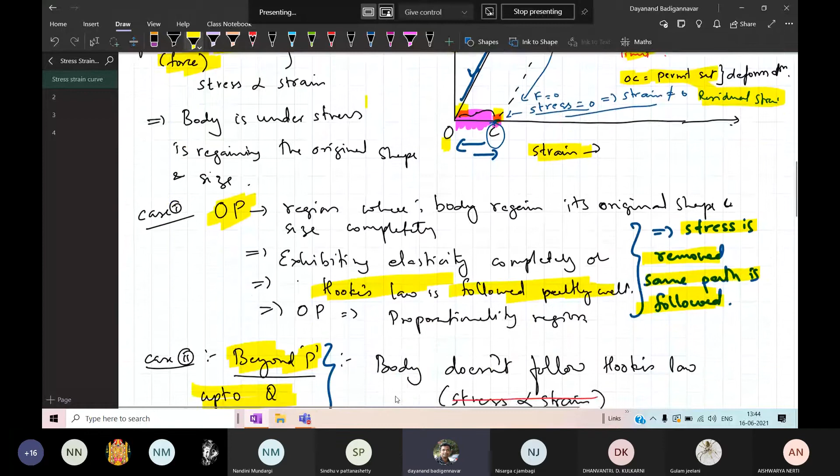This is beyond P and up to Q. So beyond P up to Q, the body doesn't follow Hooke's law - Hooke's law means stress is directly proportional to strain, and this is not followed by the curve. Though it is an elastic material, if the stress is beyond the proportional limit, it is in the elastic mode but not satisfying Hooke's law.

In this region between P and Q, it is not following Hooke's law - it is a non-linear part. But still it is an elastic material, though some plasticity has come into the picture. This is called the non-linear phase, and point Q is called the elastic limit.

That means this is the maximum stress, called sigma Y. Beyond sigma Y, if you apply any stress, the material enters into... this is called the elastic limit, or in other words, it's called the yield point - sigma Y is called the yield point.

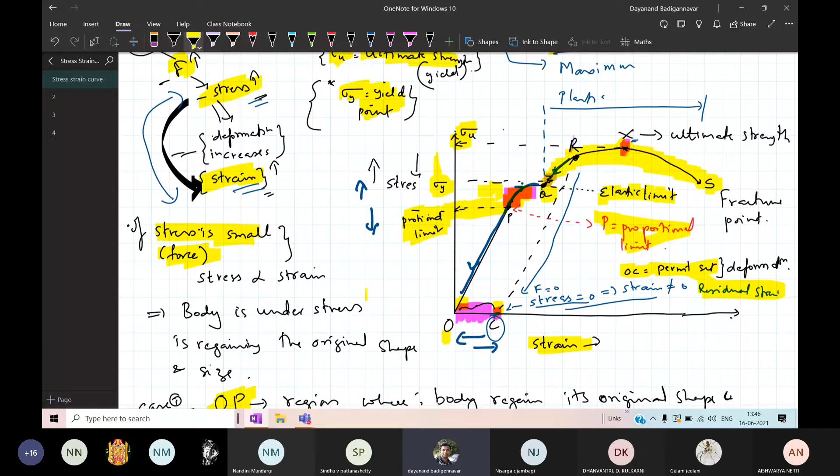Now up to point Q, what happens here? If the stress is up to this limit, the curve will follow the same path, OP. That means as the stress increases, the curve will increase from O to P, from P to Q.

But what about Q to S? Of course, it is going to increase from Q to S, but when it is coming back, it is going to decrease like this. But what happens when you decrease the stress? The curve will not follow the same path. It is going to follow a different path.

So what happens if the stress is removed? For example, at point R, if you are decreasing the stress, the curve will not trace the actual path it has taken. It is going to take some other path, the path RC, shown as a dotted line. You can see the curve it is going to take like this.

So up to this point, it is going to decrease in this manner. Once it is decreasing like this, when the stress is completely removed, our force is made zero, the strain is not completely zero. There is some amount of strain that is still existing, OC.

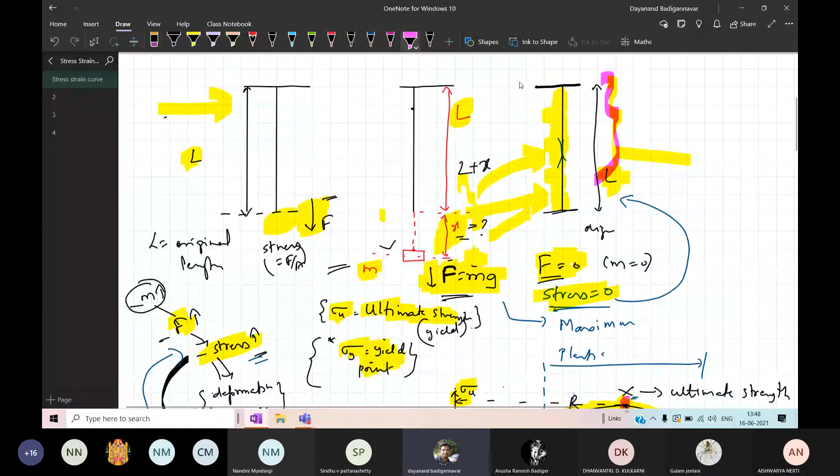So that means I have removed the force. After removing the force, if you look at the above diagram, the body should go back to its original state, but it is not in the original state — it is in the deformed state. Therefore, OC represents some residual strain, meaning there is some deformation left over even when I remove the applied stress.

This is called the permanent set. OC is called the permanent set, or it is also called the residual strain, OC, or the deformation that is existing.

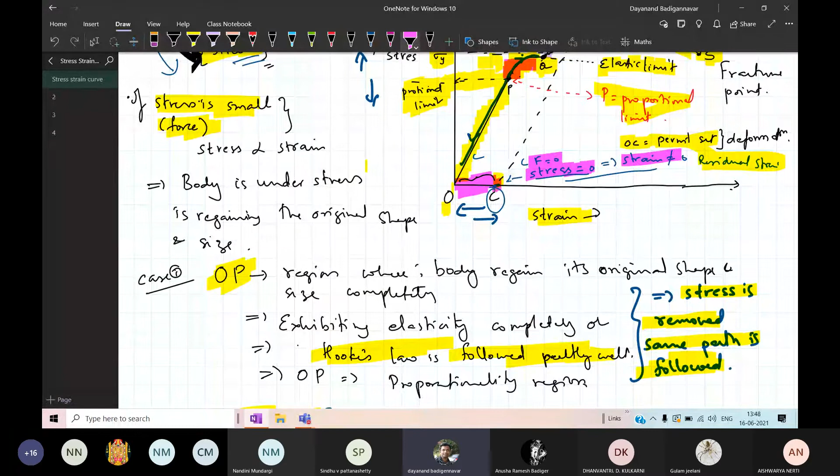Now, if you still increase the stress up to point X, this point is called the ultimate strength point. That means the stress is very, very high at point X. This value is called sigma U, and this is called the ultimate strength.

So what happens beyond this value? If the stress applied is beyond the ultimate strength, the body will start to break down — it starts to get damaged. Up to point X, if you increase the stress, it is in some good condition, but if the stress is beyond point X, the body starts to deteriorate.

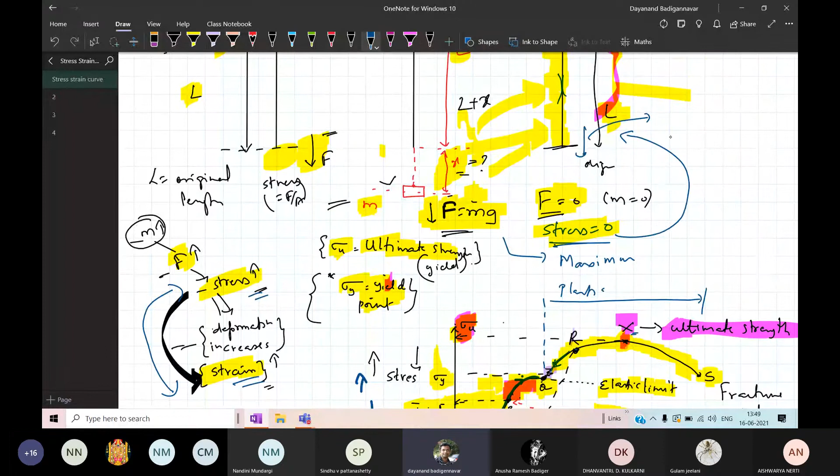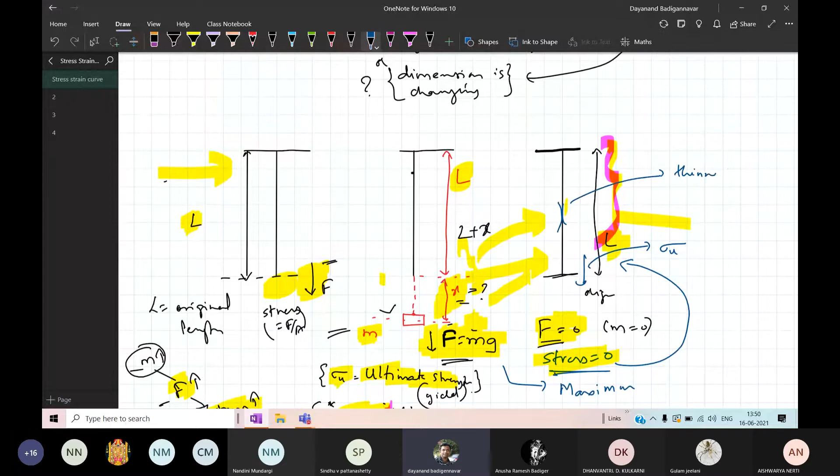So once you have the wire, if you apply a stress beyond the value of ultimate stress, sigma U, this wire starts to thin — meaning its diameter goes on decreasing if the stress is more.

So the wire is thinned in such a way that the material starts to lose its strength, and after that slowly the material gets deteriorated. If the stress reaches the value at point S, the wire completely breaks down — that point is called the fracture point. This is the way the stress versus strain curve varies for a wire.

Very simple thing, you have to remember 2 points. Between O to P, it is a linear region, obeying Hooke's law. From P to Q region, it is a non-linear region, where the material is an elastic material, but it is not obeying Hooke's law.

Beyond Q up to point S, it is a plastic region. If you remove the stress when you apply it in the plastic region, it does not follow the same path. It follows the path OC, along RC, where some amount of strain is still left over. That OC is called the permanent set or permanent deformation.

At point X, called the ultimate strength, the wire is handling maximum stress. Beyond that, it cannot handle any stress and breaks down. So at point S value of stress, it breaks up, because beyond point X, the wire starts to deteriorate from excess stress.

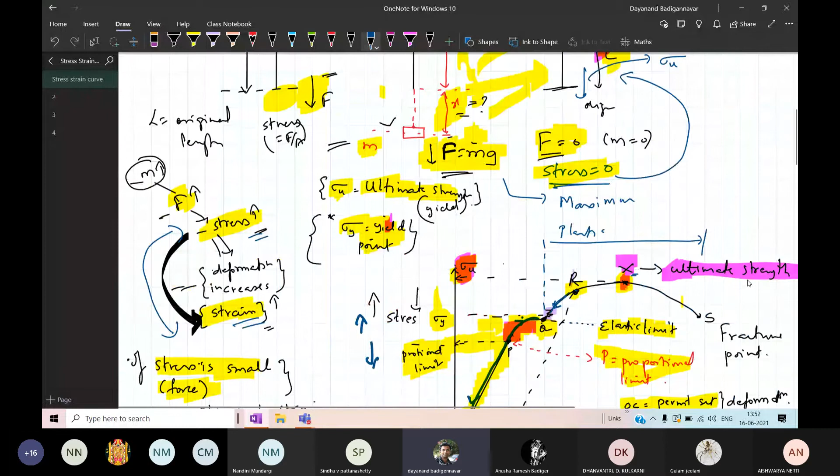So this is the curve. This is a very important question for your IA: explain the stress and strain curve. With this, we shall go for the next part.

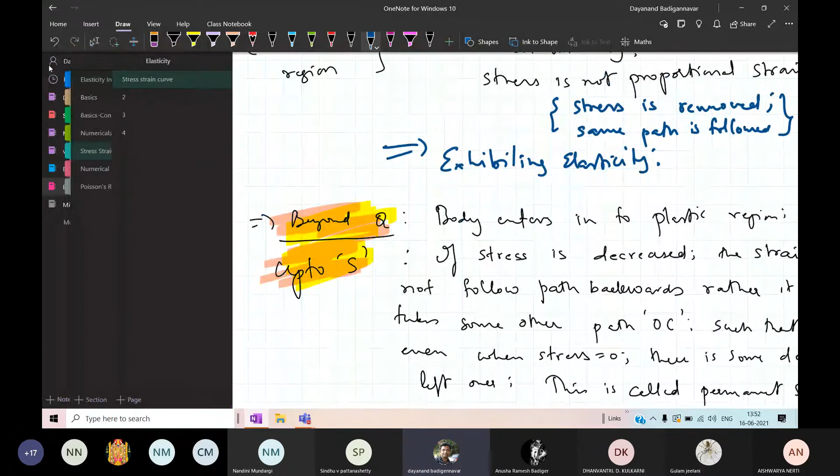Before we go for the next part, we shall solve a few problems left from the last section. Let us go for the problematic part that we have left over. This is the next one. Take down the problem.

Calculate the extension produced in a wire of length 2 meters and a radius of 0.013 into 10 to the power minus 2 meters due to a force of 14.7 Newton applied along its length. Given the Young's modulus of the material is Y equal to 2.1 into 10 to the power 11 Newton per meter square. Take down this and try to solve this.

Hello students, solve this problem and tell me the answer.

Take down this, students, do one thing: take this and solve it as an assignment. I would like to go for some other important discussion, because in the next class if I do it, it will be half done, and it's not possible for me to start a new chapter. So take this as an assignment and solve it; else I will solve it at the end. Don't worry, take this as an assignment and solve.

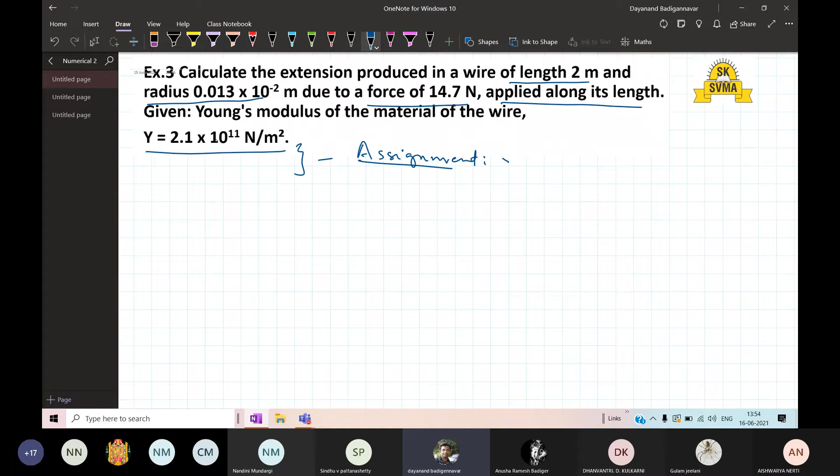Can solve it afterwards. So we shall go for the next one. There are other important terms that you should know here. There are some other terms that you should know.

There are some other terminologies or terms that are used in elasticity again and again, which characterize the physical property, which characterize the elastic property. There are many other properties, not just one. There are a few other terms that you should know.

The first term that you should know is the longitudinal strain coefficient. I have a certain wire. So what is this longitudinal strain coefficient? Let us go for that understanding.

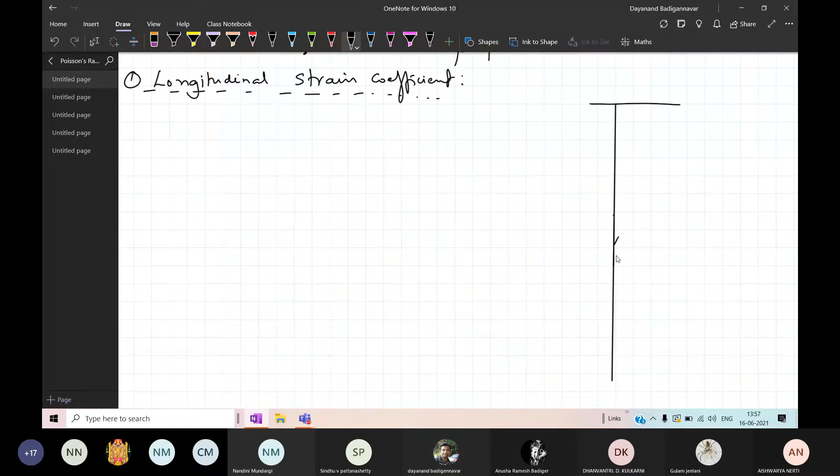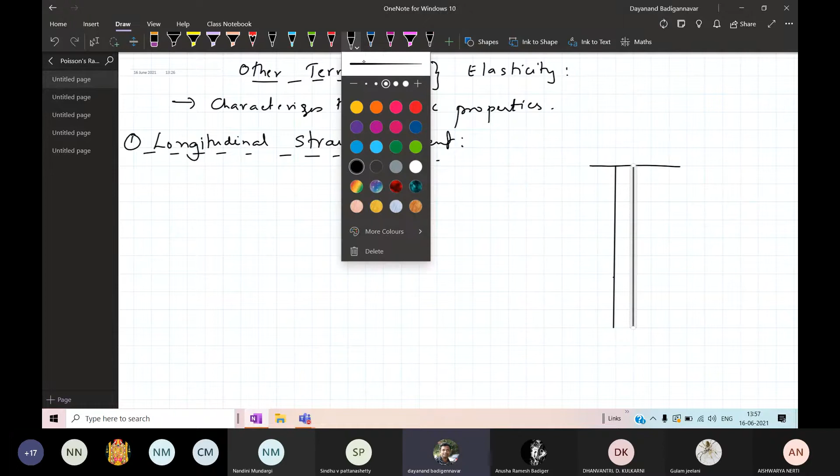I have a wire, in the shape of a circular manner. This is the wire, a circular wire, and this is the cross sectional area of the wire, whose length is L. This is the length of the wire. So what I do, I apply a force.

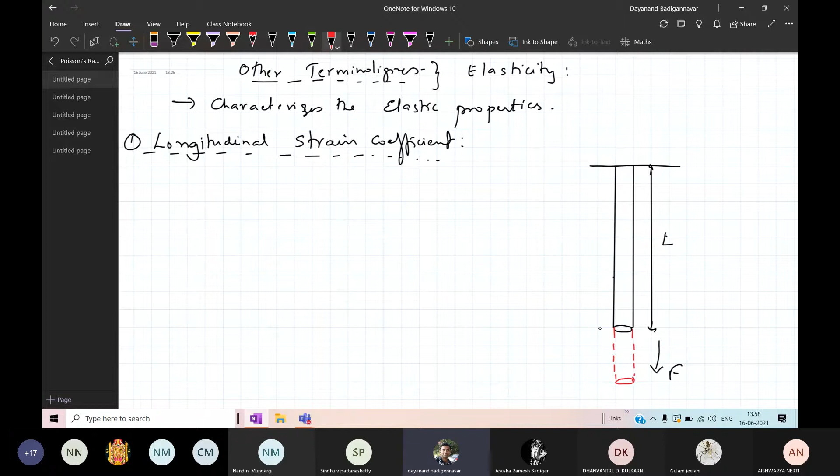Once I apply a force, there is an extension in the wire. This is the extension in the wire, like this. The wire gets elongated. Let us assume that this is the elongation that has taken place. How much is the elongation? The elongation is X.

The elongation is X. So here I can define strain. What type of strain is it? By the application of the force, which I have applied along the length of the wire, I can define the stress for this. Since it is along the wire, I should call it longitudinal. First I will define strain, then the force: once I apply the force, there is an extension in the value of the wire, so this much is the extension X. So this is the longitudinal or linear strain. This is the first one, strain.

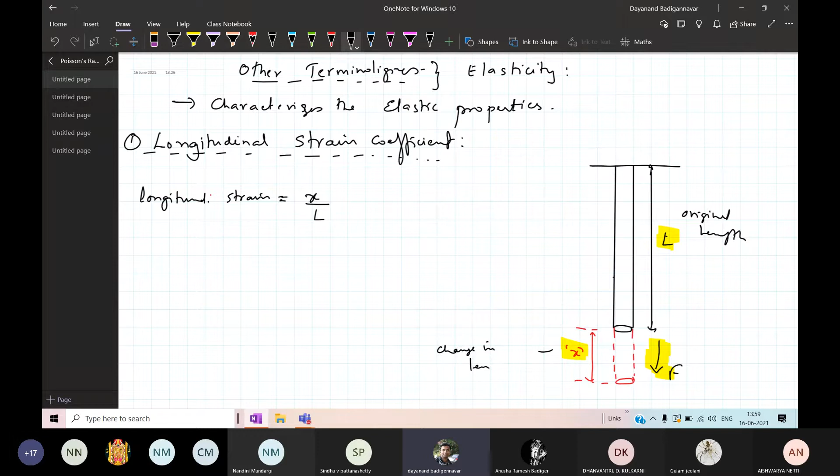What is strain? Strain is the ratio of change in dimension to the original dimension. What is change in dimension? It is the value of X, this much the dimension has changed. What is L? It is the original length. So L is the original length, and X is the change in dimension, the change in length, since length is increased. This is how I define the longitudinal strain.

Now I can also define stress. What is stress? Stress is nothing but force per unit area. This is the applied force, and this is the cross-sectional area A. So I can write stress is equal to F by A.

Now what type of stress is this? The stress is such that there is an increase in the length of the wire. So whenever the stress is such that it increases the length, that stress is called the tensile stress. It is known as the tensile stress. In general, it is also called longitudinal stress.

Now this stress I will take as T, longitudinal stress. Keep in mind, I have taken it as T, not tension. It is longitudinal stress T, which is equal to F by A. So this is equation number 1 and this is equation number 2.

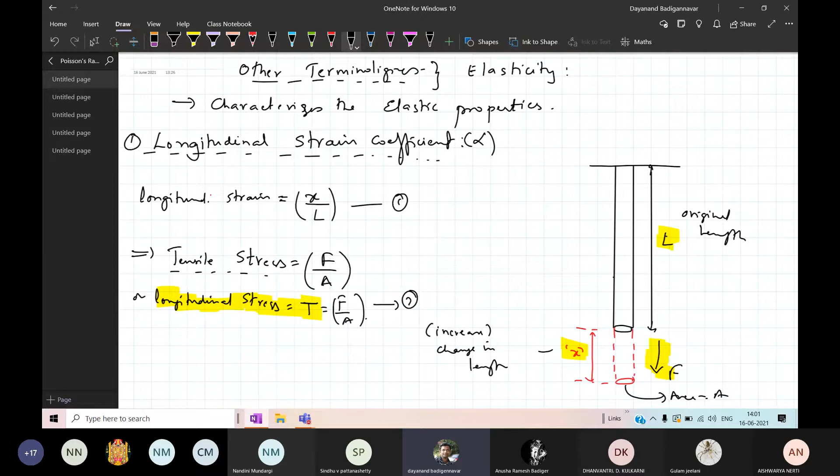Then I can define the longitudinal strain coefficient. What is this longitudinal strain coefficient? This is a very important term that we will use again and again in the coming classes.

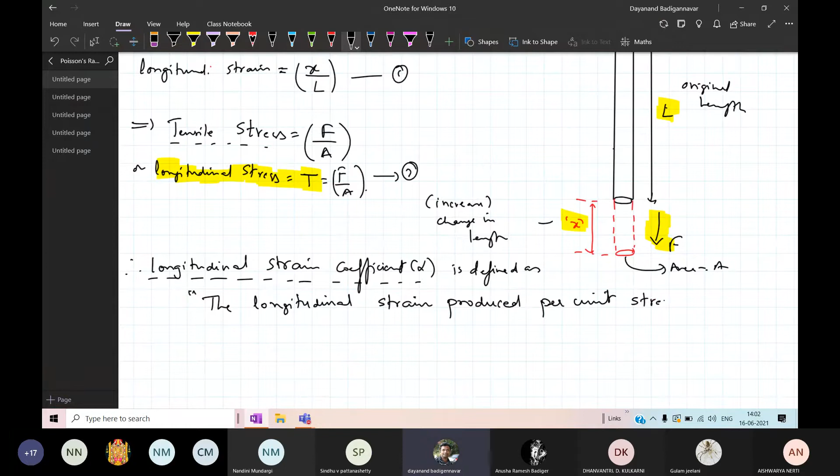The longitudinal strain coefficient is defined as the longitudinal strain produced per unit stress applied. So this is the meaning of longitudinal strain coefficient.

Just for reference, you know that modulus is defined as stress divided by strain, that is, stress per unit strain. Now I am defining the longitudinal strain coefficient alpha as exactly the inverse of this.

So if I rewrite this as a ratio, I can write the longitudinal strain coefficient alpha as the longitudinal strain produced per unit stress, that is, the ratio of longitudinal strain per unit longitudinal stress.

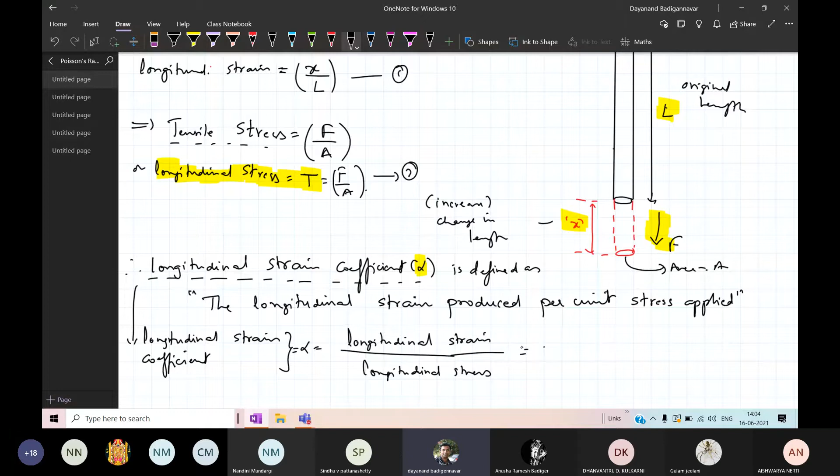So therefore I can write the value of alpha as strain divided by stress, which is just the inverse of the modulus value.

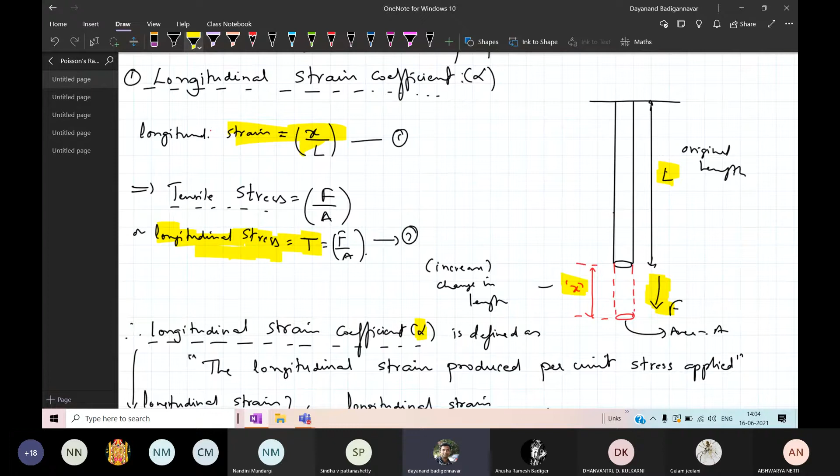Therefore alpha equals strain, which from equations 1 and 2 we know: longitudinal strain is given by X by L, and longitudinal stress is T. So from equations 1 and 2 I can write alpha in terms of X by L, the longitudinal strain, and T, the longitudinal stress.

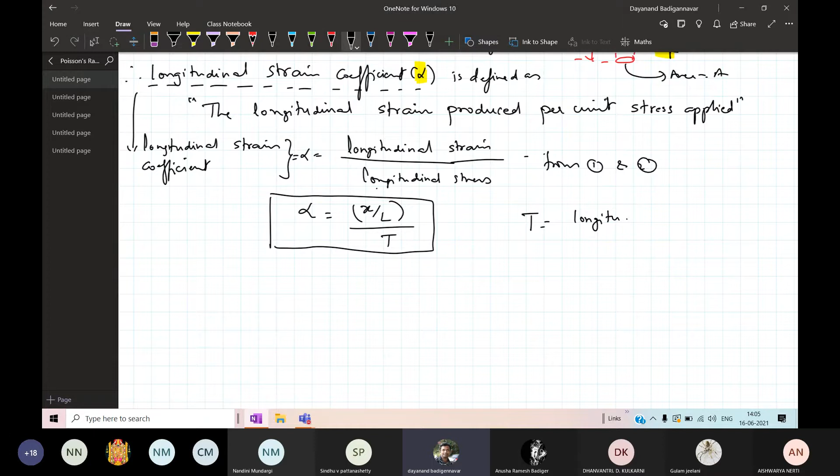Keep in mind, here T is the longitudinal stress, not the tension. Don't get confused, tension is also represented by T, but here I write T as the longitudinal stress.

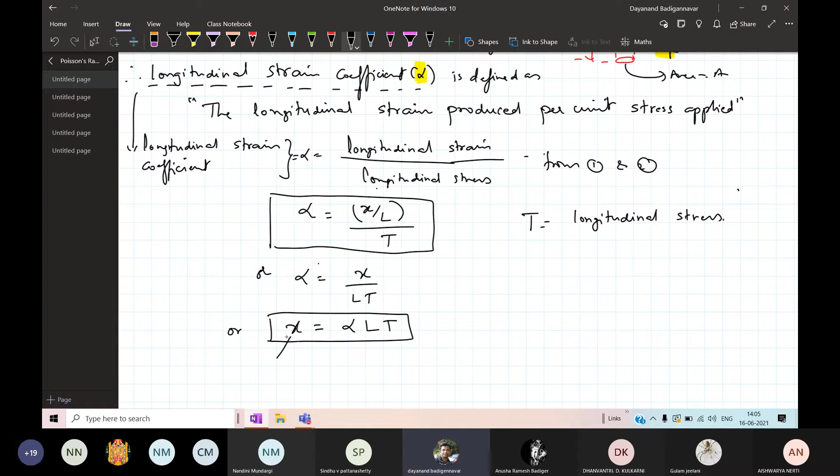Now I can write alpha is equal to X divided by L times T. Rearranging, X is equal to alpha LT. What is this X? X is the extension, the extension that has taken place. So you can calculate the value of X.

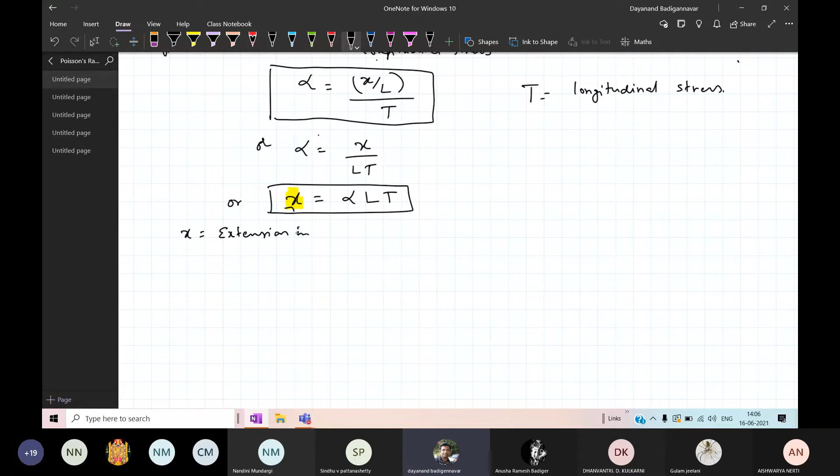Okay, what is X? X is the extension or elongation in the length of the wire. You can calculate it. We'll take this as 3, this as 4. Very important, you can calculate how much is the value of extension. If we can calculate x, okay, we can calculate x.

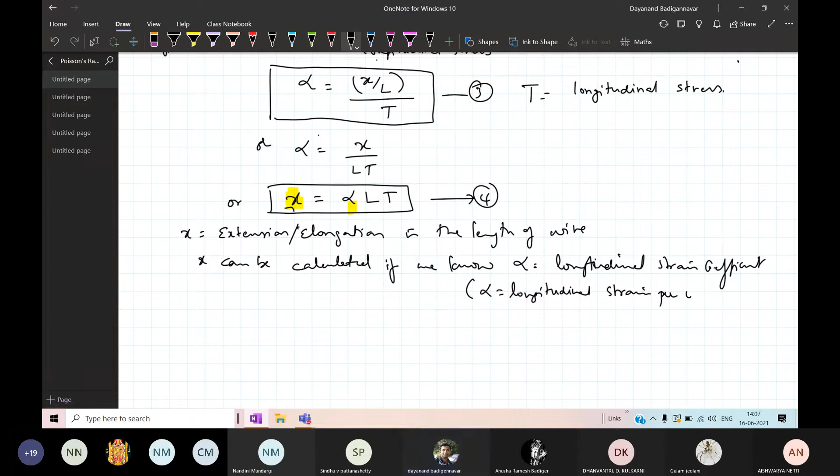X can be calculated if we know alpha. What is alpha? Alpha is the longitudinal strain coefficient. It is also called as strain or longitudinal strain. Keep in mind, it's also called as longitudinal strain per unit stress. That means per unit stress, how much is the strain that is taking place? That is the meaning of alpha.

What if you put 1 unit of stress, what is the corresponding strain? That strain is called as the alpha, for the applied unit stress - this is the applied stress, 1 unit stress. It may be 1 Newton per meter square, or 1 Newton per centimeter square, whatever it may be. So 1 unit stress will produce some strain. So what is that strain? That is called as alpha.

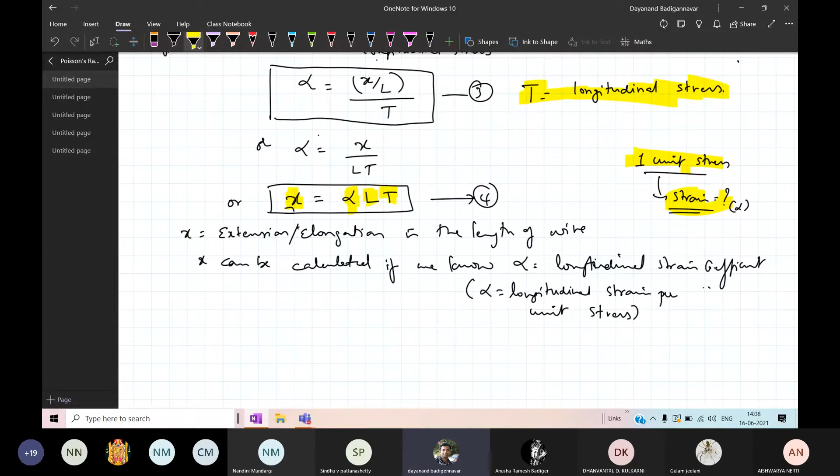Then you should know the original length of the wire. You should know the T. What is T? T is the longitudinal stress. If you know all these values, you can calculate the value of X, how much is the extension that can be produced in the wire. You are getting the point? So this is the very important point. Okay, so go for the next one. This is alpha. Hope you have taken down.

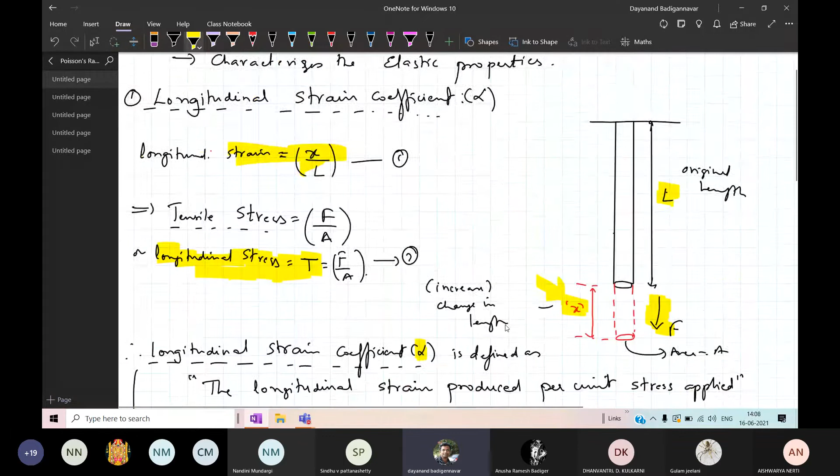Then next one, that is called as the lateral strain coefficient. This is the second term that you should know.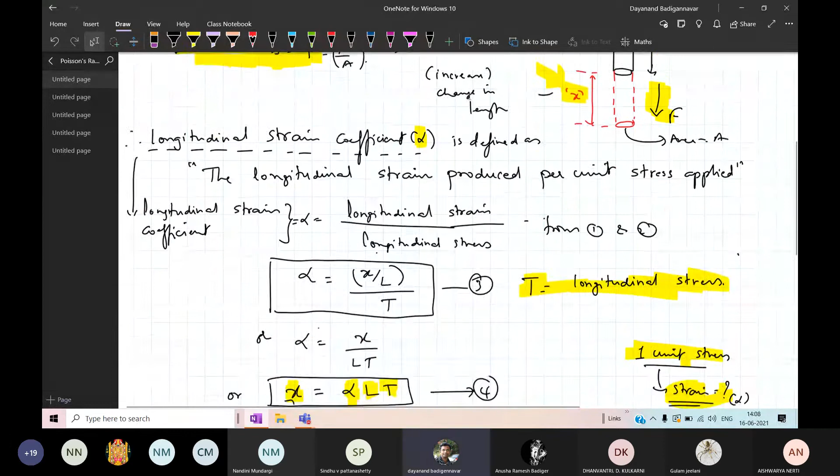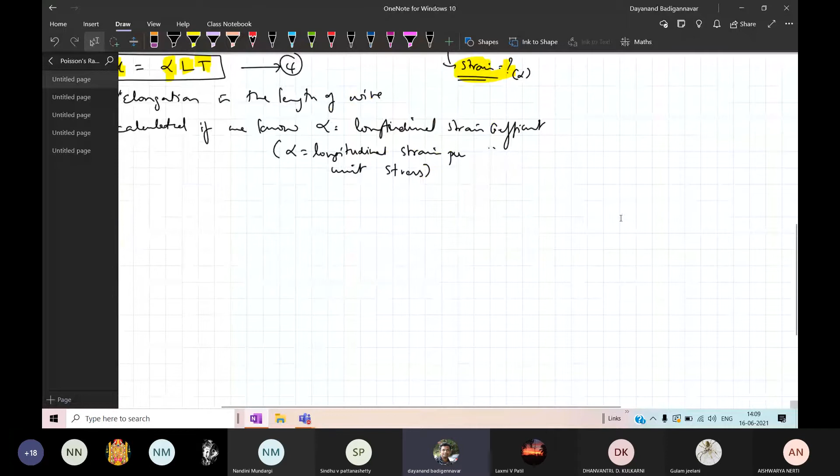Sir, students are here. Sir, want your screen? Wait, sir, okay, sorry, I was zooming that, no trouble here. Just a minute. Okay, now it's clear. Yes sir, got it? Yes sir.

Okay fine, let's go for one more important term that is called as the lateral strain coefficient. Lateral strain coefficient. This is called as beta.

Okay, so I'll explain this first, then define it. So I have a wire, same wire as you have seen the last part. I have the wire in the form of a circular shape. This is the wire which is in a circular shape.

Got it. So I will just have to make this bit larger this time, so that it is clear for you. Okay, I have a wire which is in circular manner. So therefore this will be the cross section here. This is the cross section that you have for the wire.

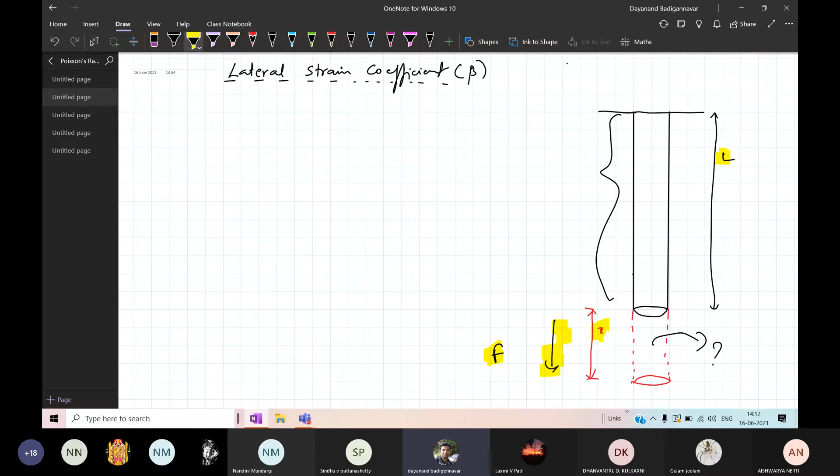You are adding some wire to it, some material to it. So this X means you are adding some material to it. Do you agree with this?

Adding some material - how? So increasing the length means you are adding some material to the wire. Is it physically possible that you are adding some material to the wire?

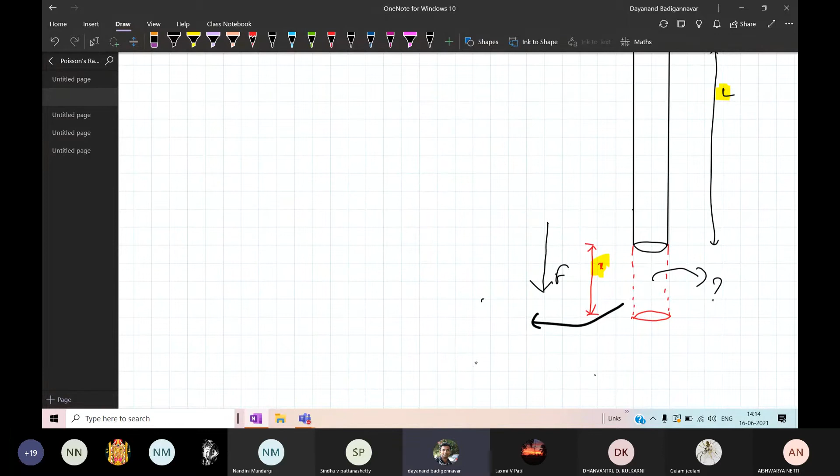Now once you apply the force, there is an increase in the length of the wire. This is the direction of the force - I will write it here again for simplicity. So this will be the direction of the applied force. This is the cross sectional area, A.

Now what happens is that when you apply a force - it may be a physical force or it may be a load M - there is an increase in the length of the wire because some of the material gets displaced in the wire. What actually happens is that by applying the force, there is a decrease in the diameter of the wire.

Keep in mind. So this much is the increase in the length.

So therefore, here I will write: the length is increased in this case. There is an increase in length of the wire. This is because it leads to a decrease in the diameter of the wire. Diameter of the wire - you are getting the point?

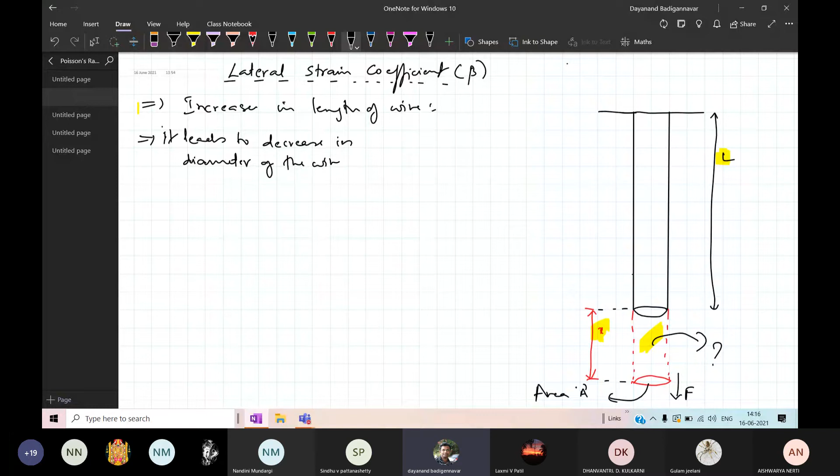Now I had asked one simple question: how is the material added here? The material is not added by hand. Actually, what happens is that once you apply a force, there is an increase in the length of the wire because the diameter - let us assume the diameter of this wire is D.

By application of the force, the length increases by X, but the diameter D decreases. The diameter shrinks, and it is going to decrease like this. This is the way it is going to happen.

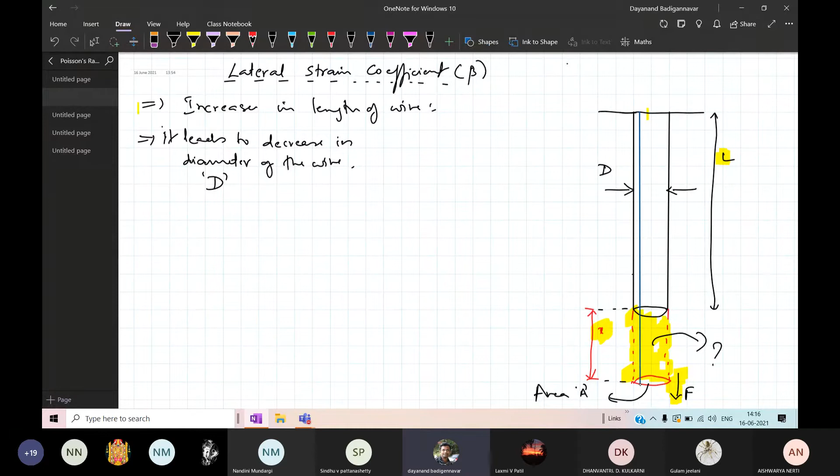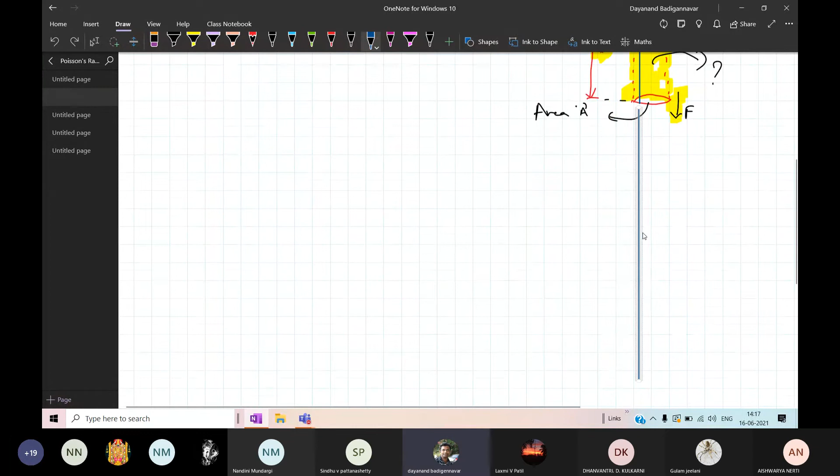So the blue line you can see there - this is the one which you have. So I have the wire, and it has shrunk in diameter.

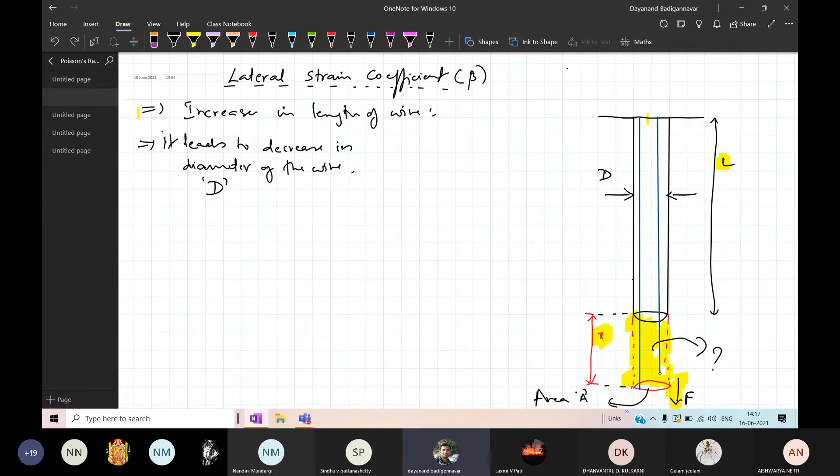So there is a decrease in the diameter. Got it? So therefore, whatever decrease in diameter has taken place, keep in mind - this is the decrease in diameter. Look at the diameter: earlier the diameter was D. Now, what is the diameter? It is lesser than the previous one.

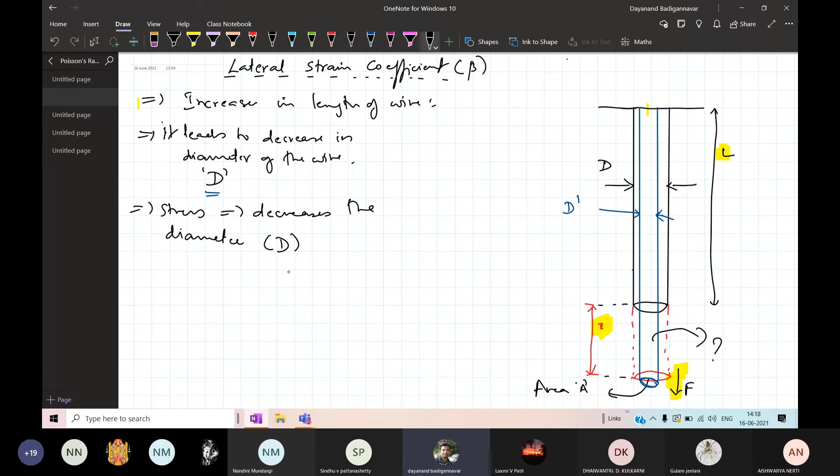It is lesser than the previous one. So what is the diameter now? The diameter is D dash. Now the diameter decreases. Therefore, here on application of the force, the stress that is present decreases the diameter. The diameter decreases - what is the diameter? Diameter was D, and it decreases to the new diameter, D dash. You are getting the point - the wire has been thinned.

So if you have seen the rubber that is used in a sweet box, I have given an example. No, this is a box, and you are having the wire, the rubber, like this.

So this is how the rubber works. It is perfectly fitting the box. Is it not? Since it is perfectly fitting, we are using it.

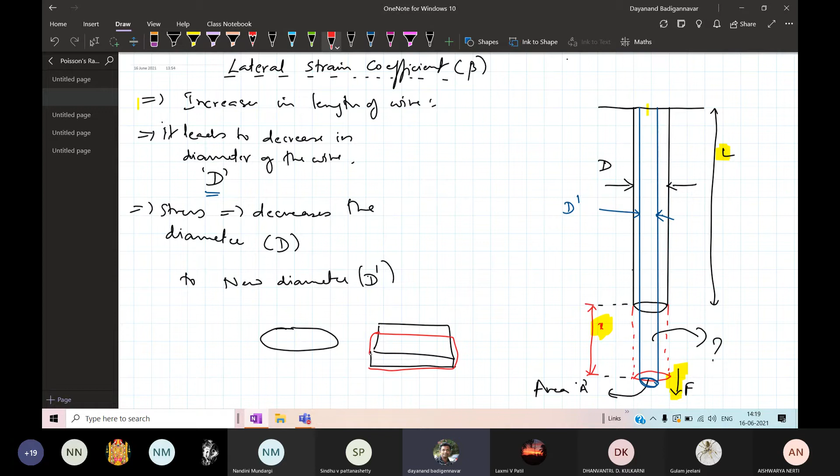Now if I pull the same rubber, it is going to have an extension. If it is extending like this, meaning if the dimensions are increasing, are we adding material to the rubber? No, we are not adding any material, but still there is an increase in the length.

If you look at this rubber, the diameter is decreased. This is the diameter D of the wire of the rubber in rest position when the force is not applied. When I apply the force, it gets elongated. At the same time, the diameter becomes D dash, which is lesser than the original diameter.

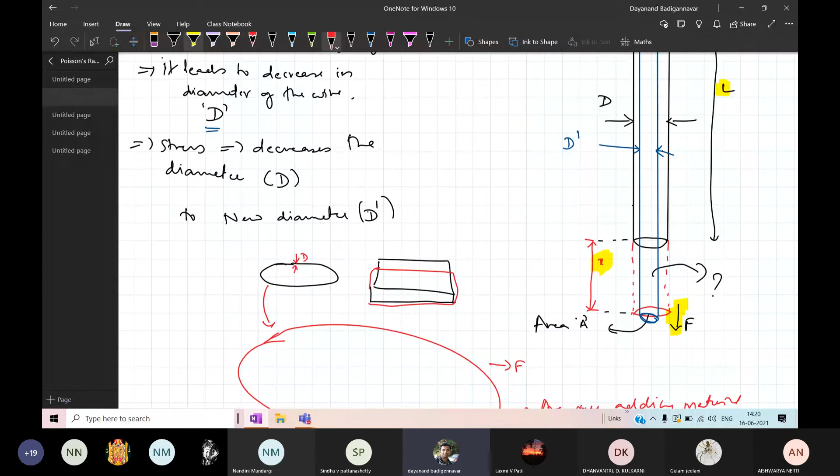Similarly here in this wire, when we apply force, which force am I applying? I am applying this force. So once I apply a force, the diameter which was D gets shrunk to D dash.

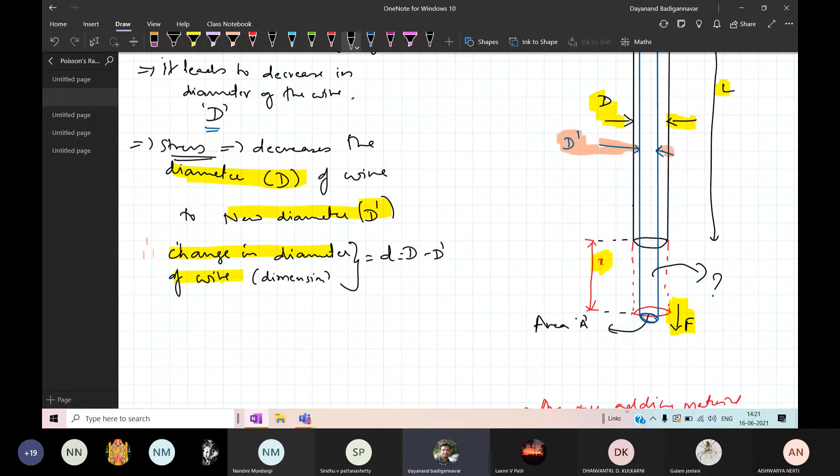So change in diameter means change in dimension. It is the change in diameter. Dimension is changed - which dimension? Diameter. Now I can define stress for this.

What I can do first is define strain, then I will define stress. How do you define strain? Strain is defined as the change in dimension.

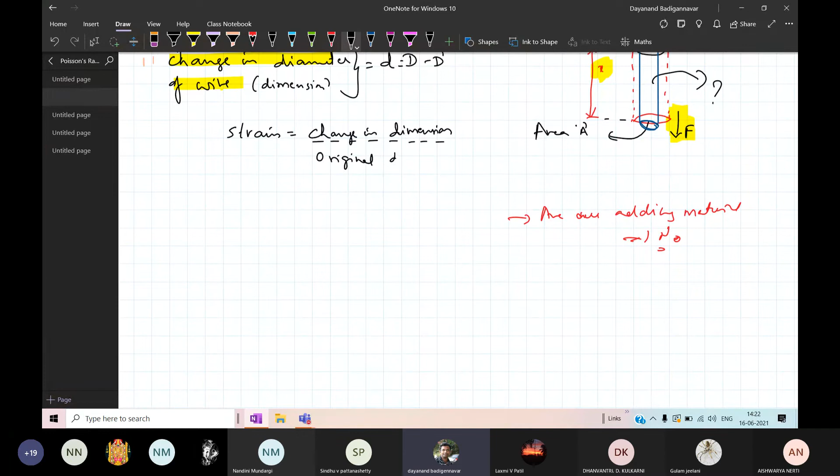Change in dimension to the original dimension. Original dimension.

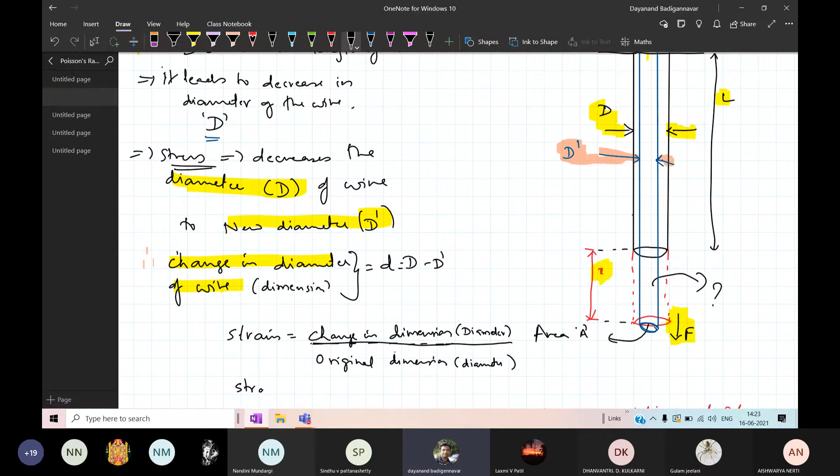This is the ratio of change in dimension to the original dimension. What is the dimension that is changed? It is the diameter that has been changed. So therefore I can write strain is equal to change in dimension.

What is the change in dimension? It is the diameter. Keep in mind, what is the dimension? I have to mark it as the diameter. What is the change in dimension? It's the diameter. So I have to take this as d. So strain is equal to small d divided by the original dimension.

This is the original dimension. So I will write it neatly here: original dimension.

Original dimension, original diameter. What is the original diameter? Original diameter is D. You can look here, the one with the black ink - that is the original diameter.

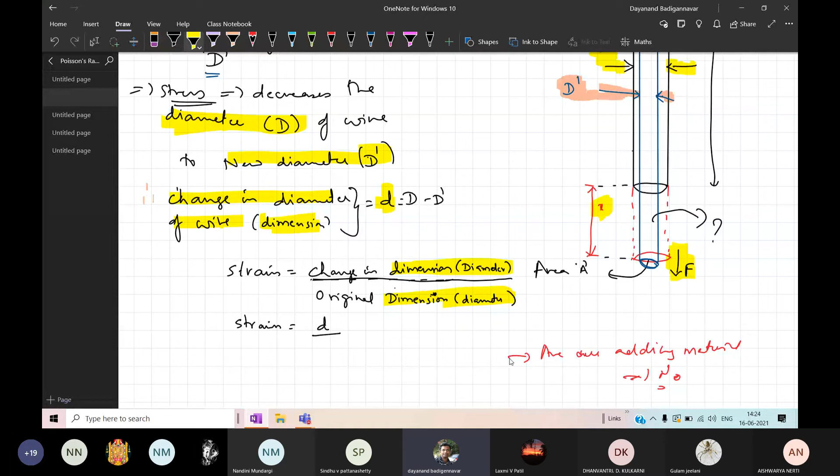Okay, this is the original diameter.

Okay, new diameter after the stress is applied. So therefore change in diameter is d minus d dash. Okay, so that I can take it as small d. Here it is written d minus d dash is the small d, and original diameter I will take it as d.

Now here this strain is not just simply called as strain, it is called as lateral strain. It is called as the lateral strain.

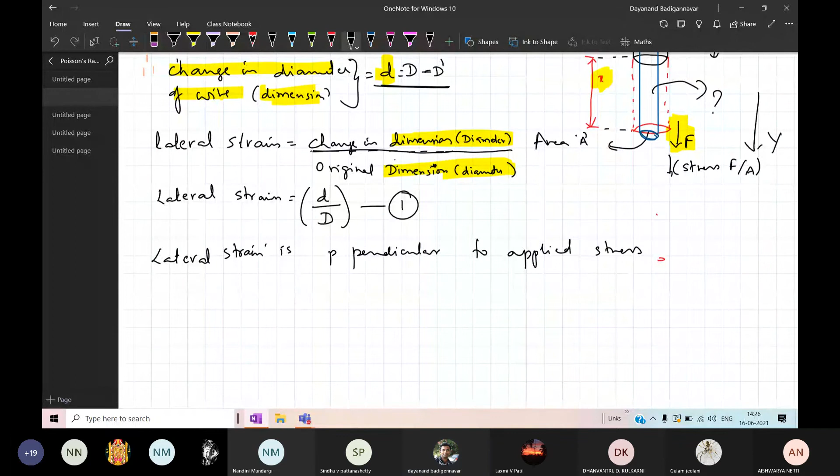Okay. Now, therefore, it is called as lateral strain d by d.

Now, after that, I can write the stress. Okay, which type of stress? Okay, it's a normal stress I can write. Okay, it is longitudinal stress only. So I can write the value of stress as, okay, the stress is given by, okay, how to write the stress? So this is the stress what you have. You can also write it as longitudinal stress, longitudinal, or I can write as tensile stress. So I can write this stress as T equal to force per unit area. This is called as the force per unit area. This is the force that you have. Area is the cross sectional area. Therefore, stress T is equal to F by A.

Okay, this I will take it as equation 2.

Now, I can define the term lateral strain coefficient beta. Okay, I can define the lateral strain coefficient beta as defined, I can write it as defined in the same way as we have done in the last part.

Okay, how to define it? It is the lateral strain. I can write it as it is defined as the defined as the defined as defined as.

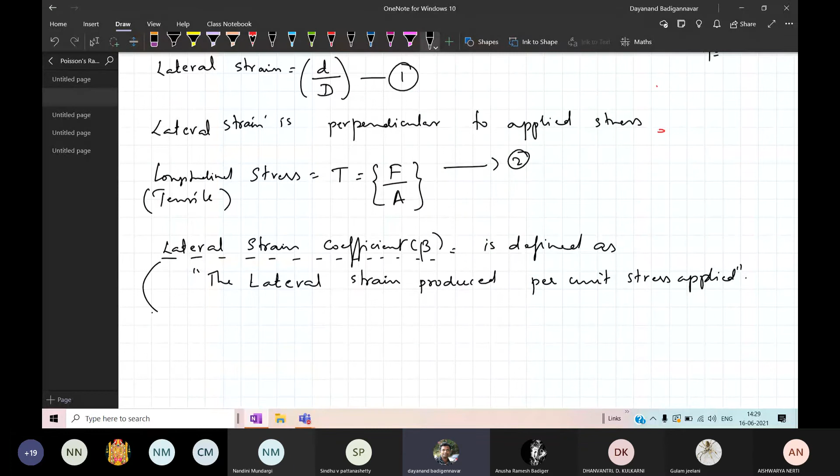Therefore, I can write here lateral, or I can write the same thing, lateral strain coefficient, okay, equal to beta. This I can write, it is the ratio of lateral strain divided by, it is not, look here, per unit stress.

Therefore, per unit stress that is applied, per unit stress. Which type stress? It is maybe applied stress, or it may be longitudinal stress. Okay, I'll just write it as applied stress. Okay, per unit stress applied.

So from equation 1 and 2 I can write, therefore, okay, from 1 and 2 as we have done in the last part, from 1 and 2, equation 1 and 2. So this is also called as lateral strain coefficient beta. Okay, this can be written as beta, can be written as, okay.

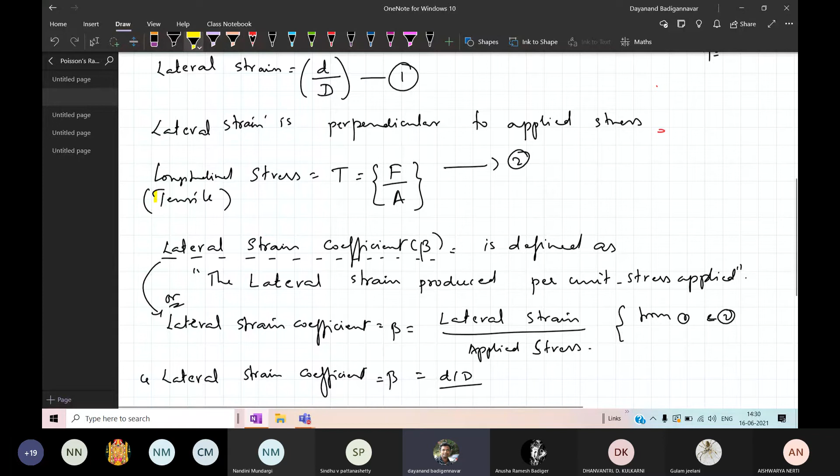So what is lateral strain? It is d by d. I can write it as lateral strain coefficient beta is equal to lateral strain is small d by capital D. Applied stress, this is nothing but the tensile stress what I have. This is nothing but the applied stress. This is T. This is the lateral strain equation number 1, and this is equation number 2.

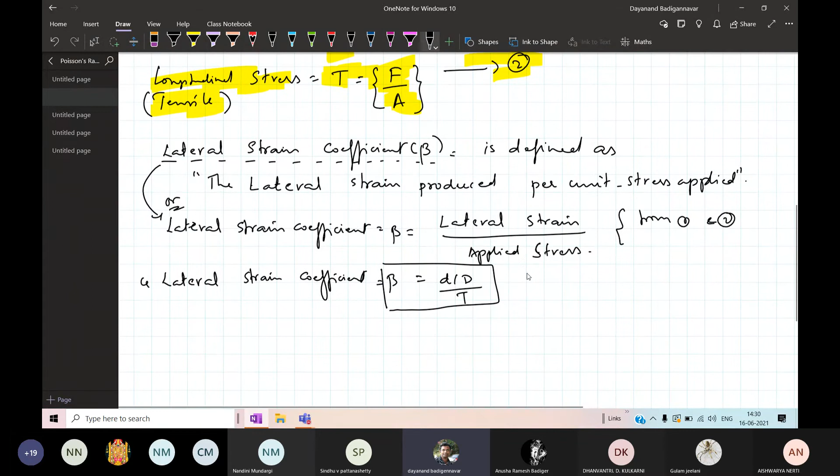Okay, so therefore I can write stress, instead of stress is equal to F by A, I will take stress is equal to T. I will just take it as T. Okay, so this is the value for beta. Okay, lateral strain coefficient. Okay, so beta, therefore beta is equal to, this I will take it as equation 3. So beta is equal to d by d, or I can write it as d divided by capital D into d, therefore dT.

Therefore, d is equal to beta d into t, so this I will take it as 4. What does this 4 tell you? It tells you that d is actually the value of d. So this d is nothing but the change in dimension of the wire, that is, change in the dimension of the diameter. How much diameter is changed? Okay, so this is the D.

What does this D stand for? D stands for the change in, particularly the decrease in the diameter of a wire. This is the value of D. How much is the decrease in the diameter of a wire when you apply the force? You take a wire, you apply the force F.

There is an increase in the length of the wire, this is the increase in length by X. So once the length is increased, the diameter D shrinks to D dash. It is going to decrease from D to D dash. Therefore, the change in diameter is D equal to D minus D dash.

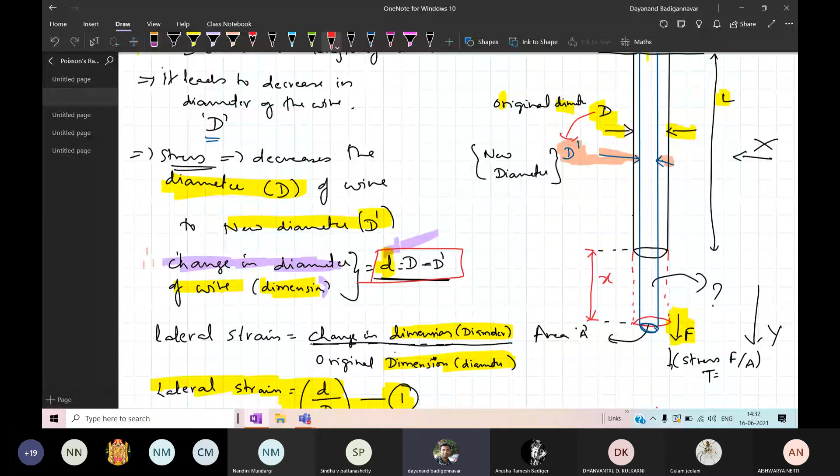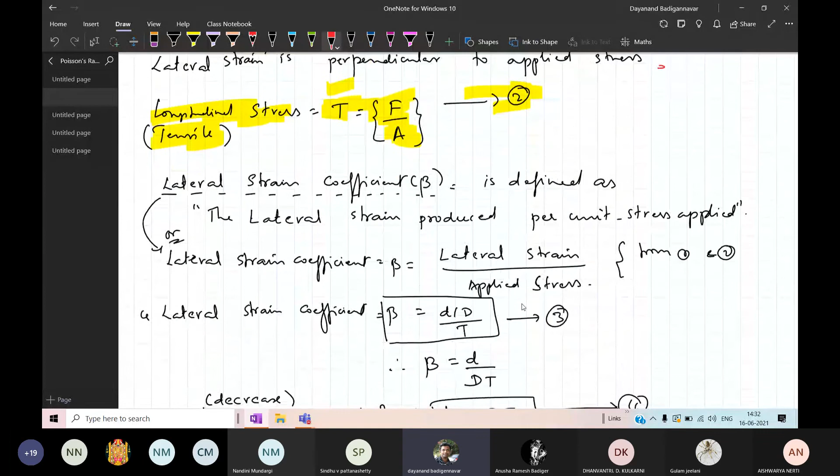Therefore, strain by stress applied, lateral strain by applied stress, that is, lateral strain is D by capital D and stress is T. Therefore I get the decrease in diameter, how much decrease is taking place per unit stress - that is called the D.

You have the decrease. If you know beta, you can calculate how much is the decrease in diameter. What is beta? It is the lateral strain coefficient. D is the diameter, original diameter, and T is the stress that is applied. So it is the lateral strain coefficient. D is the original diameter.

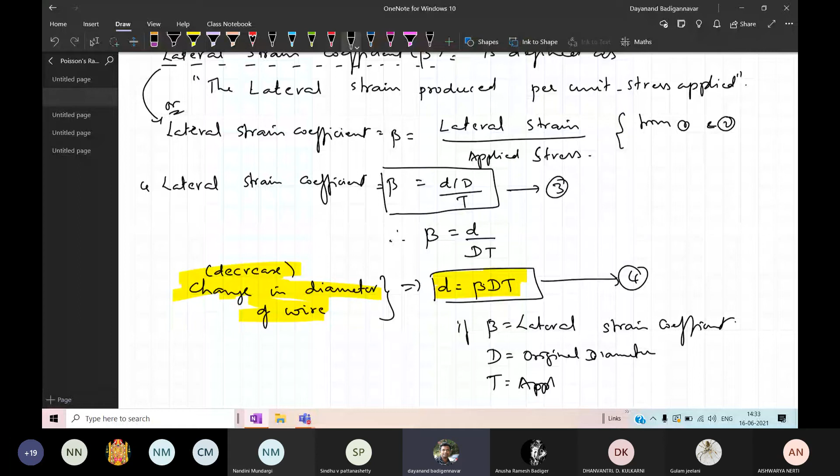T is the applied stress. If you know this value, I can easily calculate the value of D - how much is that decrease in diameter. And at last, there is one important term called the Poisson's ratio. It's called the Poisson's ratio.

It is given by sigma. What is this Poisson's ratio? It is defined as this: within the elastic limit of a material, of a body, the ratio of lateral strain to the longitudinal strain is constant.

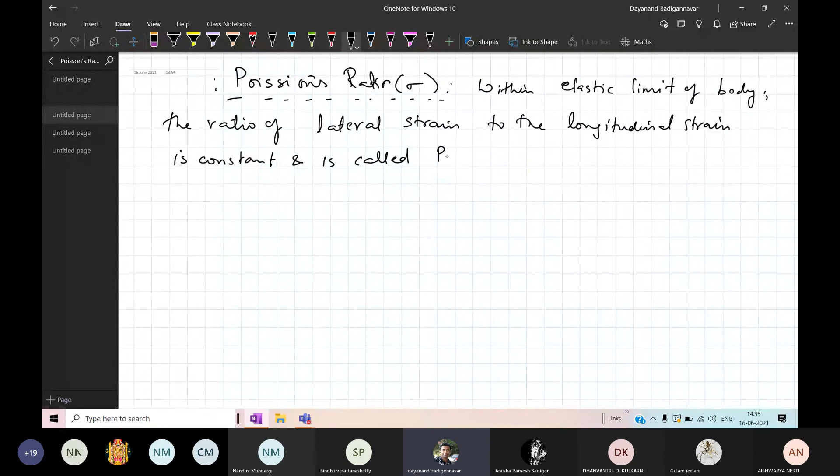It is constant, and that constant is called the Poisson's ratio. This is sigma, the ratio. It's called the Poisson's ratio.

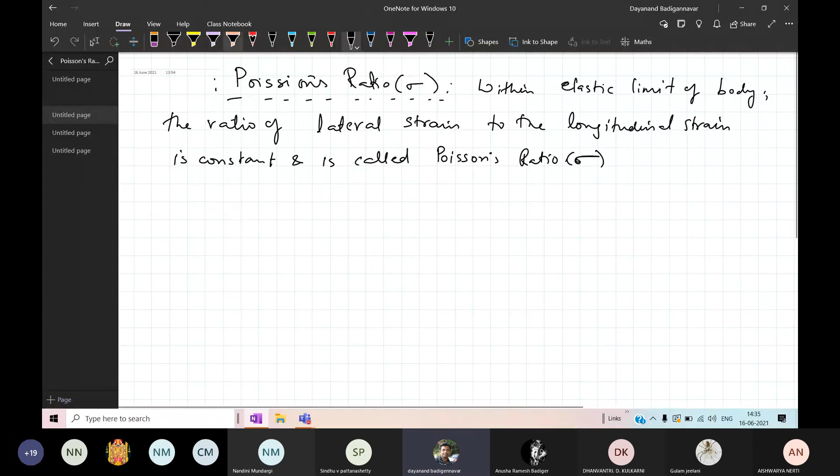Now read it again. Within elastic limit, the ratio of lateral strain to the longitudinal strain is a constant. If I take the ratio, which ratio? That is, if I take the ratio of lateral strain to the longitudinal strain.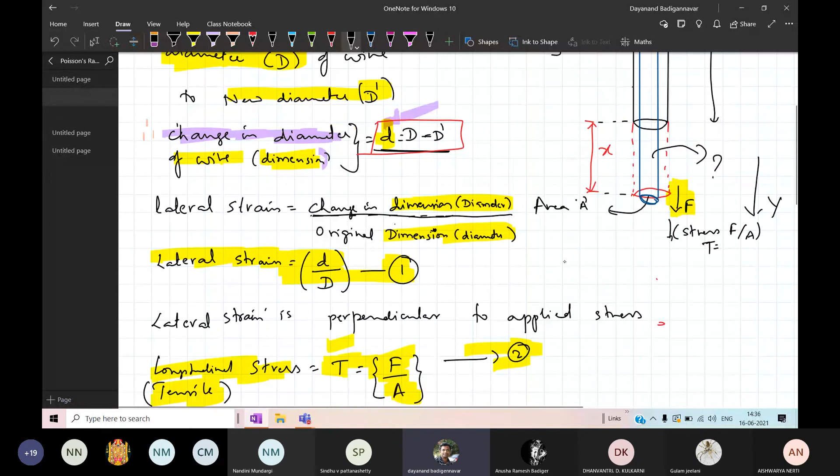If I take this value for a wire, if you look at this diagram, from the first one I can find this. This is the lateral strain, I have alpha, this is alpha. This represents the lateral strain, and this represents beta. Beta represents the lateral strain, and alpha represents the longitudinal strain coefficient.

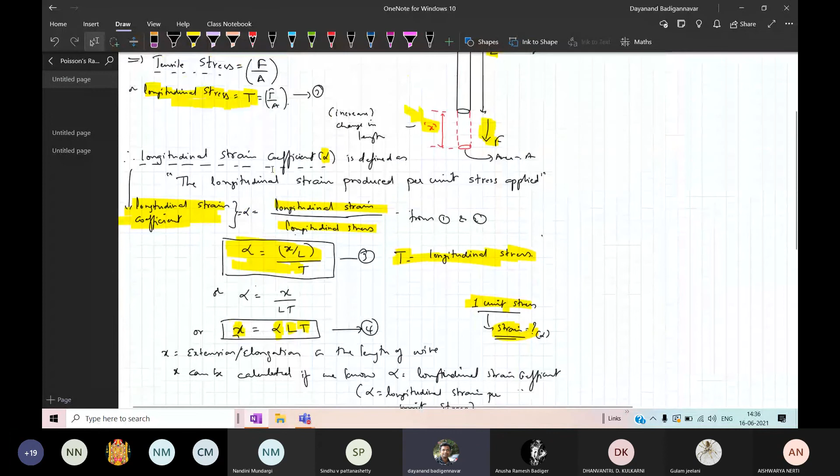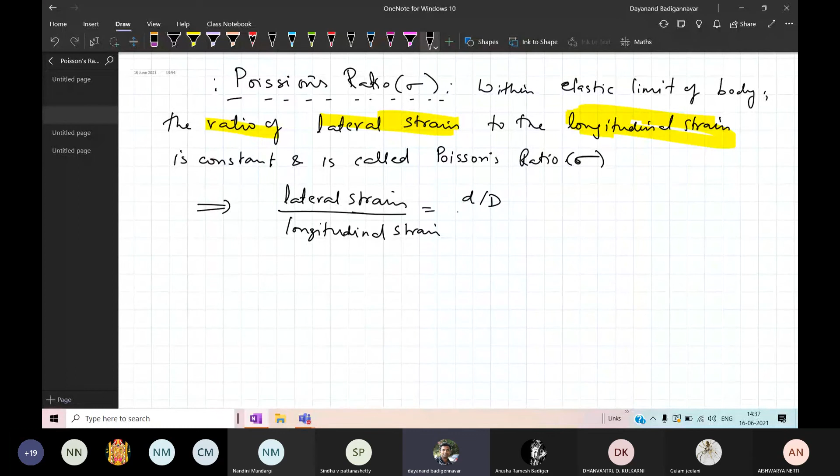Now here I can find what is lateral strain. The first case I have written here is longitudinal strain. Here it's the length, so I can take the longitudinal strain as x by L. Lateral strain, as in equation number 1, is d by D. So the ratio of these two is the lateral strain, d by D, change in diameter to original diameter, over longitudinal strain, which is change in length to original length.

If you take this, this is actually a constant. It gives you a constant. So therefore, here it is d by D.

It gives you a constant. This constant is called the Poisson's ratio. Or I can still write it as lateral strain by longitudinal strain. I can rearrange it like this. d by D, I will divide this by t, the stress. x by L, I will divide the numerator and denominator by t.

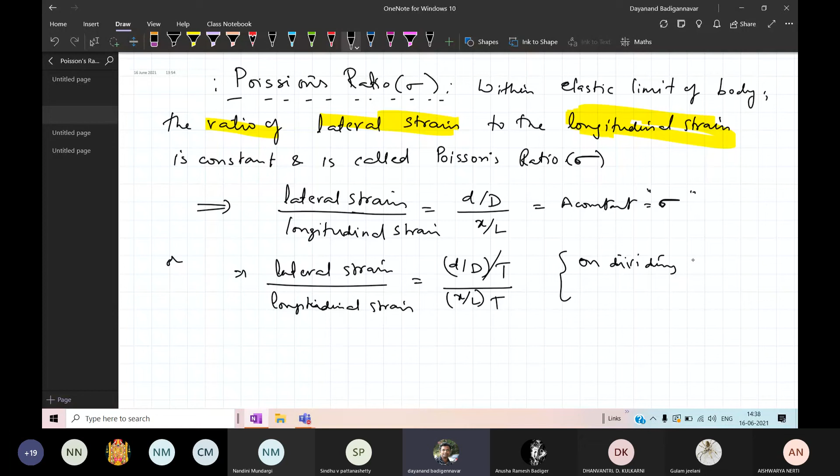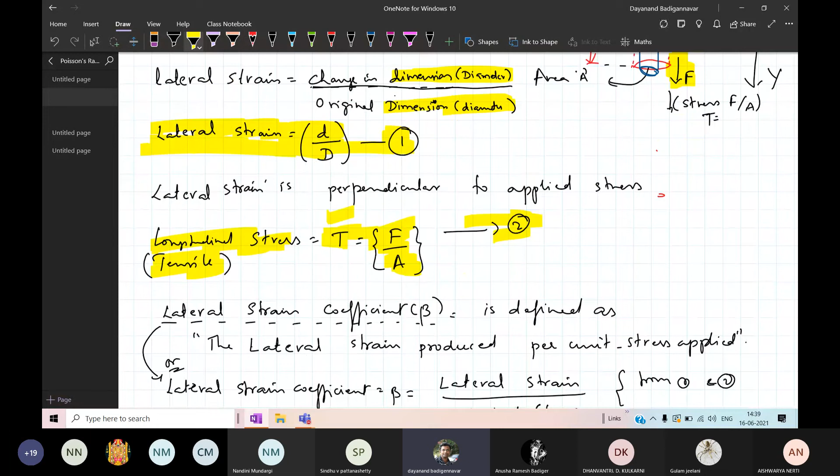So this is on dividing numerator and denominator by the stress that is applied. What is the stress that is applied? T. NR means numerator, DR means denominator, just in shortcut I have written like this. So here this is a constant, keep in mind. Now look at this d by D by t, this numerator, this is nothing but beta. If you look at that equation for beta, beta is given by d by capital D divided by t, lateral strain divided by applied stress.

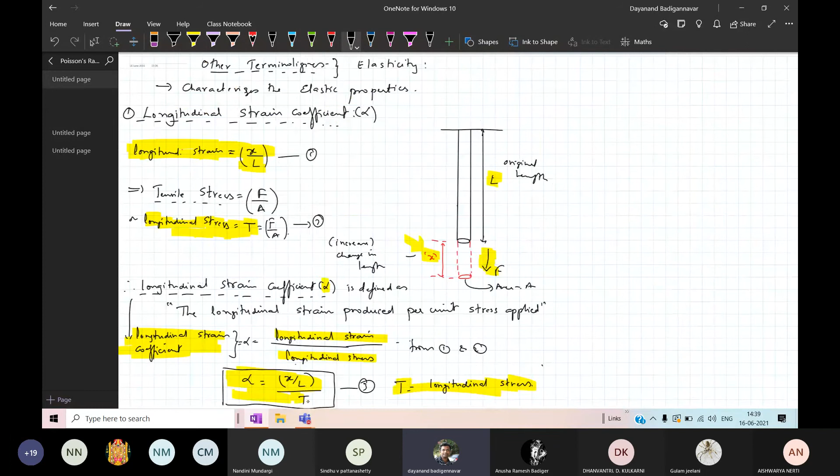Therefore, this can be written as beta, and this is the denominator, x by L divided by t. I have missed it here, it's divided by t, so x by L divided by t. This can be written as alpha. If you look at this one, alpha is x by L by t. Beta, what is beta? d by D by t.

So if I rearrange it for this equation, then the ratio, what is the ratio? It is the ratio of lateral strain to longitudinal strain, which is nothing but beta by alpha, that is equal to a constant. It will be a constant. This constant sigma is called the Poisson's ratio.

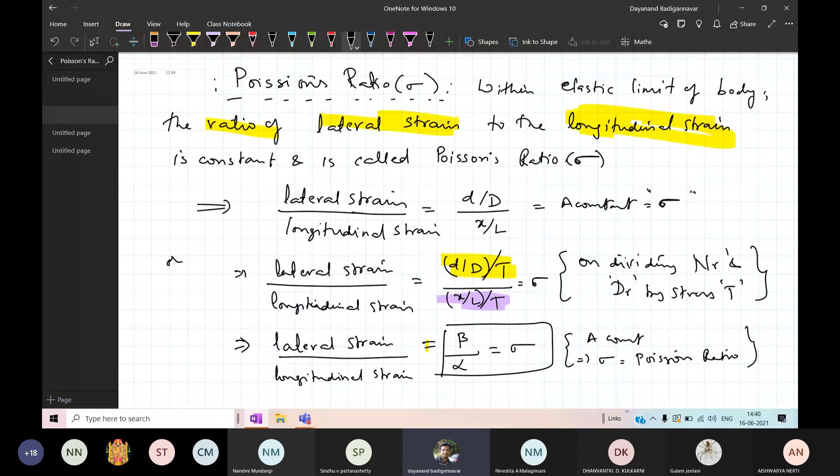Or I can define the Poisson's ratio as R. Very important, this Poisson's ratio definition, we will use it again and again. Poisson's ratio is defined as the ratio of lateral strain to, this is beta. Now keep in mind, here you have beta, and this is alpha. Beta stands for lateral strain coefficient. The ratio of lateral strain coefficient beta to longitudinal strain coefficient alpha is a constant, called the Poisson's ratio.

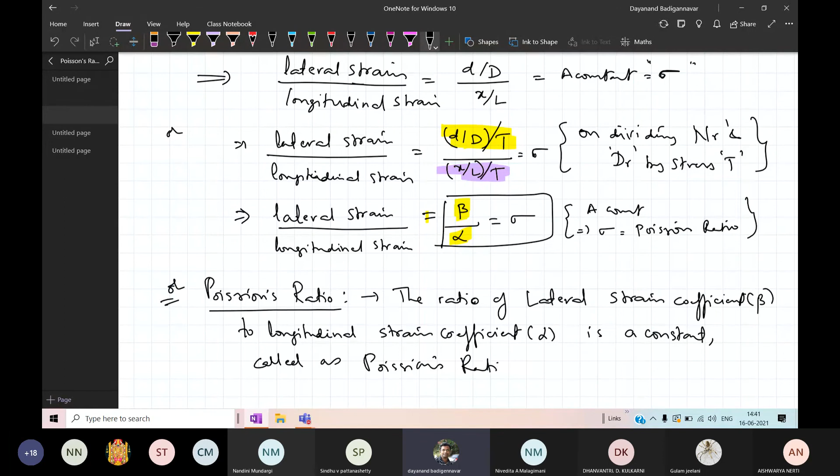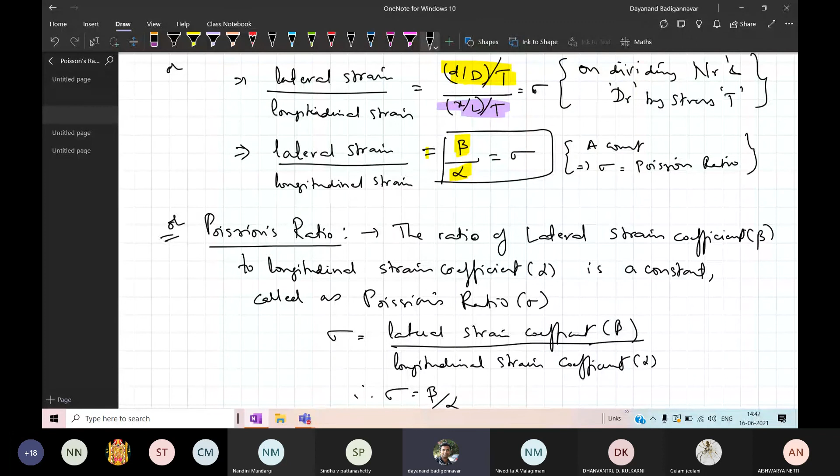It's called the Poisson's ratio. Directly you can also write it. So what is the ratio? Poisson's ratio is nothing but the ratio of lateral strain coefficient by longitudinal strain coefficient, this is beta and this is alpha, so beta by alpha. This term we are using again and again in the coming classes, because there are a lot of derivations that we are using.

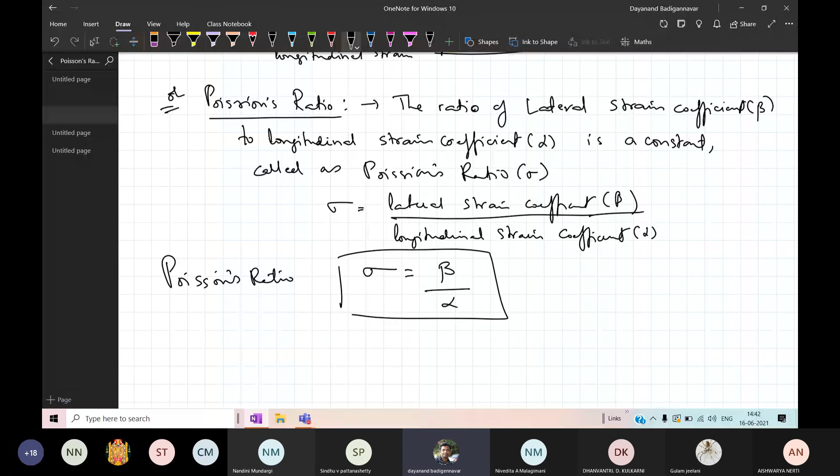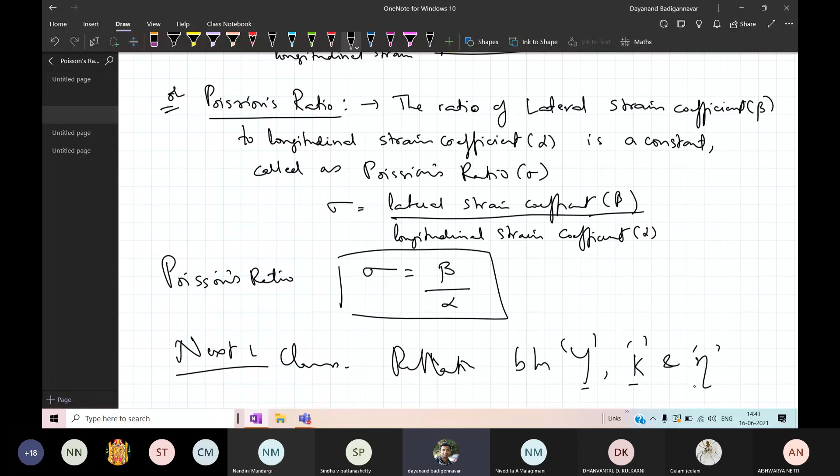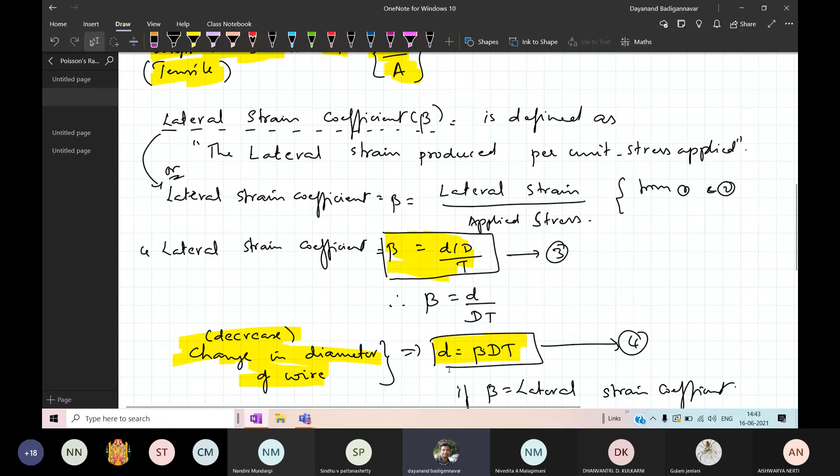Poisson's ratio, okay, hope it is clear to you. So I shall stop here itself. In the next class, very important, don't miss that class, because there are relations in the next class. What we'll do is derive very important relations between Y, Young's modulus, K the bulk modulus, and eta, the modulus of rigidity. Young's modulus, bulk modulus, and modulus of rigidity, these three are the independent elastic moduli. We can connect them using some relation, so we'll build some relations. These relations are very simple but confusing, therefore you have to be there in the next class. We will use all these concepts, alpha, beta, then how to calculate D, how to calculate L, X extension, so we will derive it in the next class.